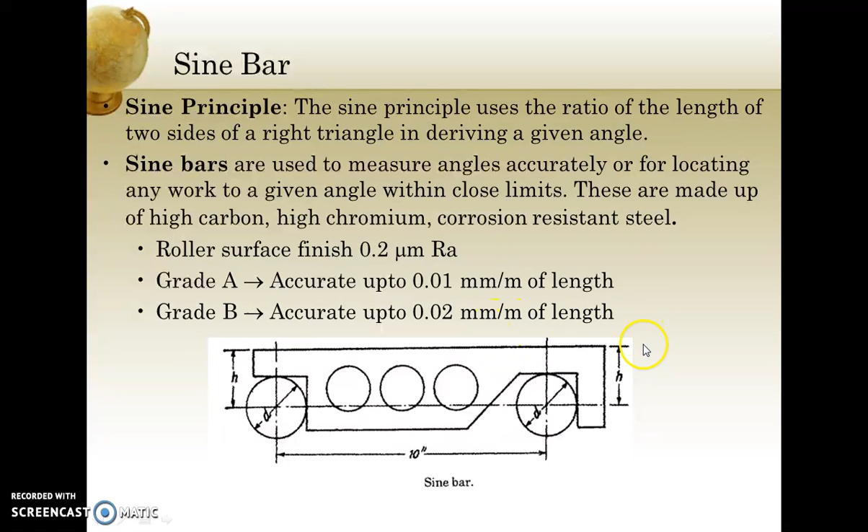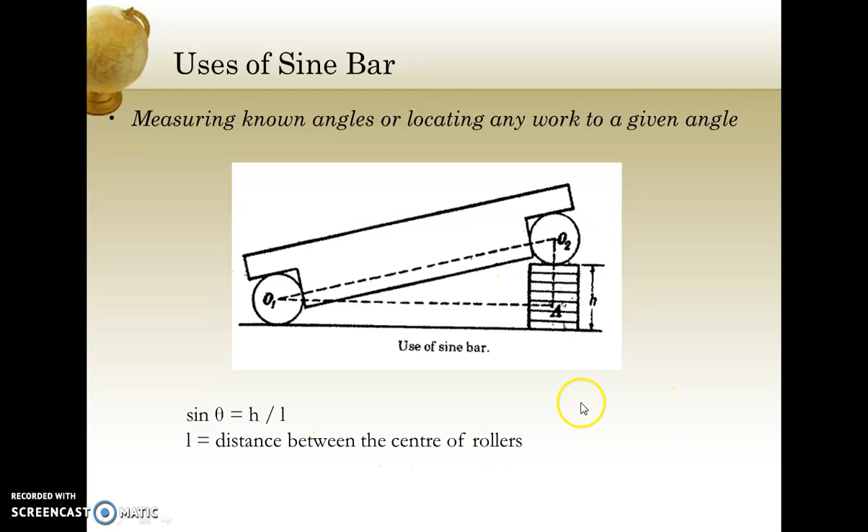Here is the included working angle, theta, and we can measure it with the sine principle, as it is named sine bar. Sine theta equals h divided by the total length, that is the distance between O1 and O2. L is the distance between the centers of the rollers. So with that, we can calculate the height or even the angle.

Another aspect of the sine bar is we can put slip gauges of definite heights directly underneath one of the rollers, put the workpiece on top of the sine bar, and with the help of a dial gauge check straightness, or indirectly see whether the surface finish is maintained, or if some angular portions are provided, because the dial gauge reading will change at a particular position, which can be pointed out.

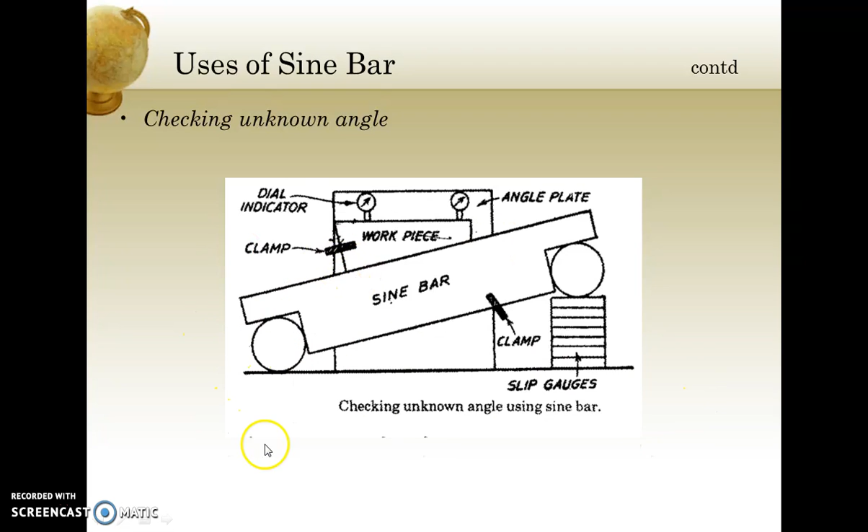Here, clamping of the workpiece is very important and has to be done correctly. And the sine bar, of course, has to be kept all the time on a surface plate, which is a defined surface for this.

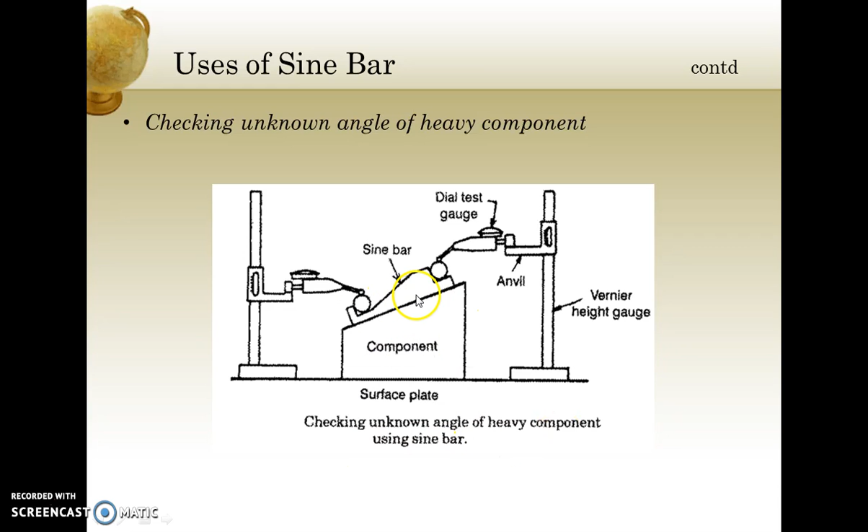This is one of the applications where we can put the dial gauge directly at the top, checking the unknown angle of a heavy component using the sine bar. So the included angle of the surface can be measured with the help of a reference line.

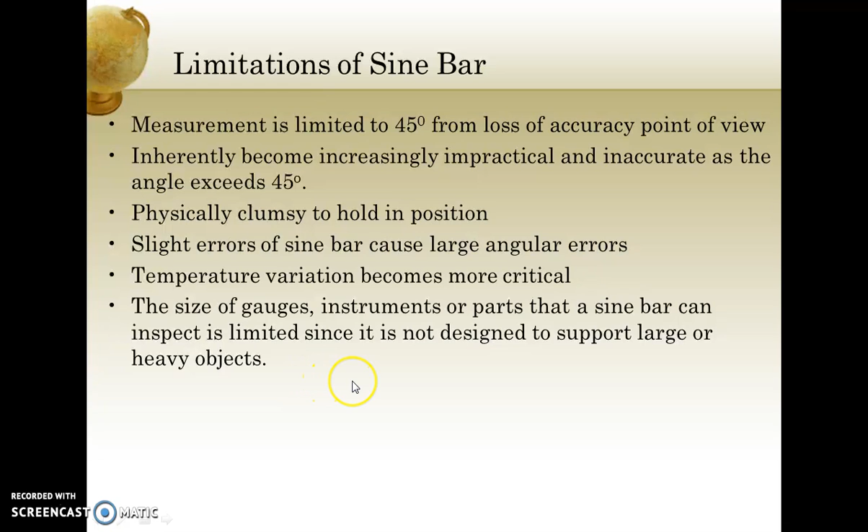As for the size of the parts, the sine bar can inspect only a limited size and is not designed to support large or heavy jobs. So big jobs, irregular profiles or intricate shapes cannot be checked for angles with the sine bar.

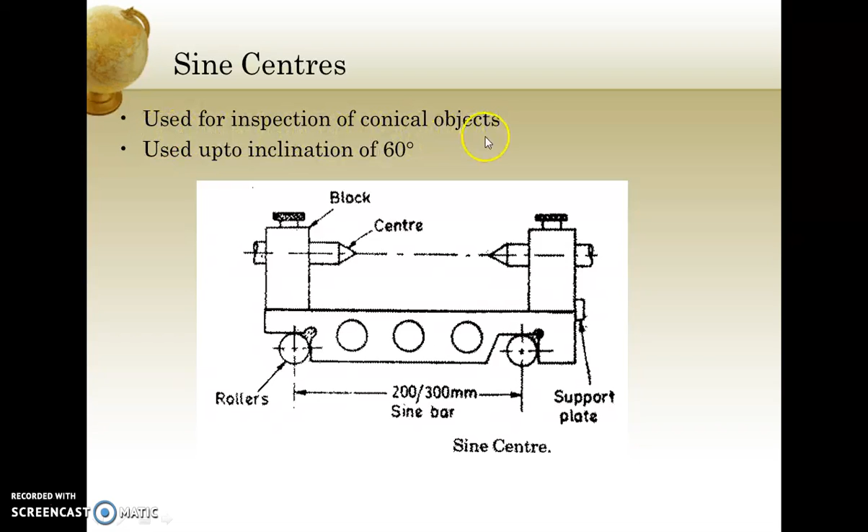Sine centers are a newer extension of the sine bar, where on the top there are two centers, and you can hold the job between these two centers, and with the help of a dial gauge, again, the inclination angle is limited, here to 60 degrees. Inspection of conical objects is done with the sine center.

Here also, slip gauges are added for a particular height and inclined angle, the conical work can be placed, and other required measurements can also be done on this type of setup.

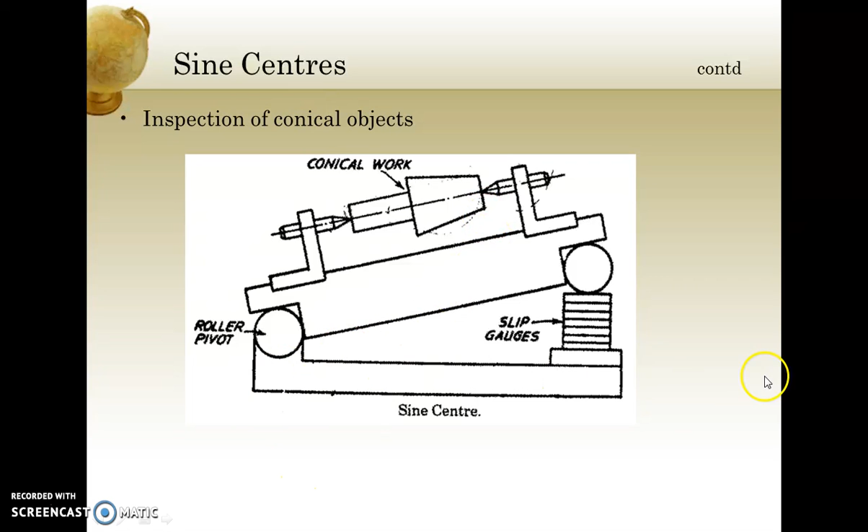Now the rest, the angle gauges, which are normally defined by a particular surface, will be explained later on by my colleague.